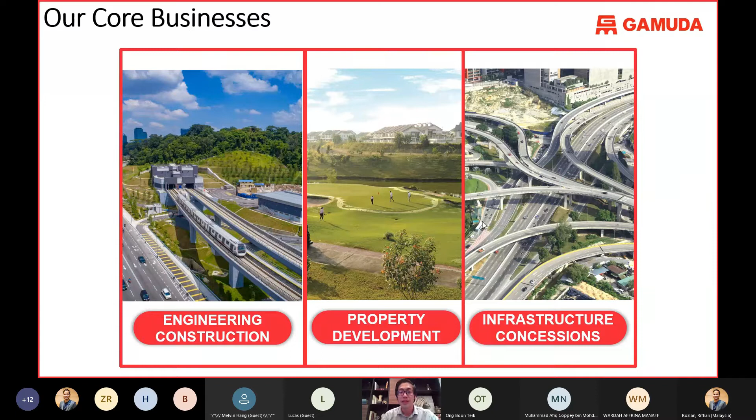Gamuda—who we are. Essentially we have three main divisions in the group. One is engineering and construction, primarily heavy infrastructure—if you're familiar with our group, we've recently worked on the MRT projects in Kuala Lumpur. We also do property development, and the third of our core businesses is infrastructure concessions. If you're familiar with the central area, we built the KESAS, the LDP, and so on, and we also own the concessions for these highways.

We have both local and global footprint. A lot of our business has focused on the construction of the MRT lines in Kuala Lumpur over the past few years, since 2012. We've completed the construction of MRT 1, and we're now building MRT 2. And for those of you following the news in Malaysia, there have been recent announcements for MRT 3, which we're looking forward to.

We also have the first digital IBS factory in Malaysia, which I'll cover a bit later—essentially precast construction, where we cast panels or building components in a factory and then bring them to site to assemble. This is one of the key themes and one of the big shifts in the construction industry in the years to come. We do property development, and in earlier years we focused a lot on roads and highways, but in recent years we've transitioned a bit away from that towards public transport and the like. We also have operations in Taiwan, Australia, Singapore, and previously in places like Bahrain, Qatar, and India.

Our vision and mission—the very striking word you see on screen is 'innovative,' and innovation has always been a big part of our DNA. A lot of our projects haven't just been open tenders; we've actually come up with our own proposals and presented them to the government and private players, and very often they've been taken up.

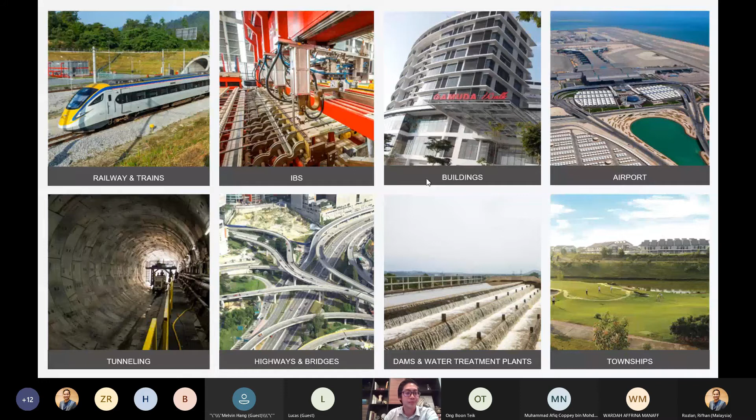But we also do things like water treatment and dams and so on. This is also a very recent project that has been announced, the Penang South Island. Some of you may have seen it in the news. This is primarily a reclamation project where we will reclaim 3 islands to the south of Penang, and the main theme for this island is green.

For those of you familiar with the term, and it's something I'll cover later, this island will embrace ESG principles, and we're putting the environment and green first. So here we will put bikes ahead of cars, and there will be sources of renewable energy and the like.

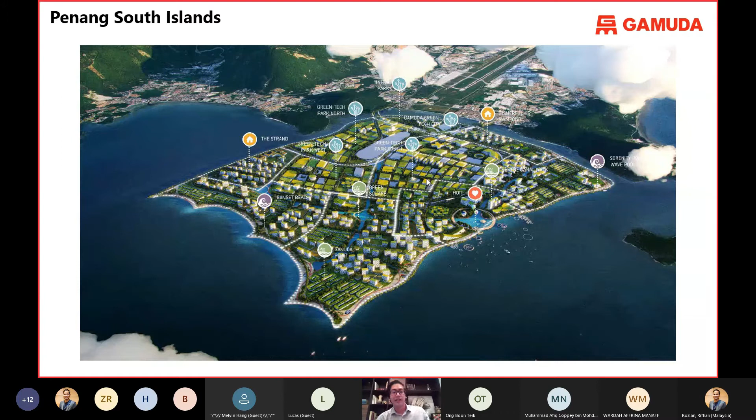So back to innovation. A lot of our innovation in recent years has been focused on the construction of our metros, because that has been the core of our business for the last few years. We've won quite a number of international innovation awards, and I'll share more about this later.

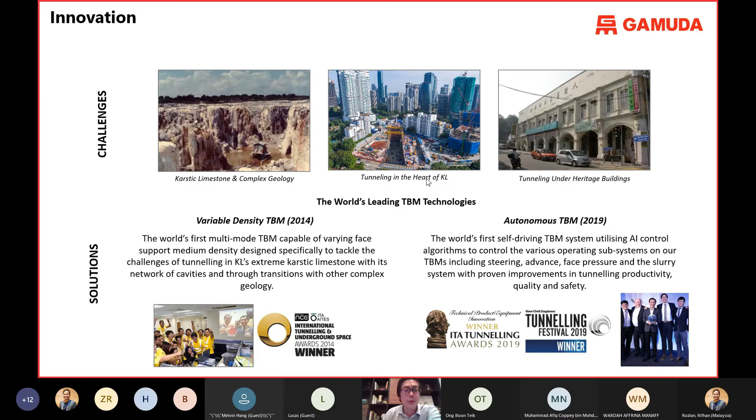And of course, as a contractor, safety is also very close to our heart. In recent years, we've been really committed to safety, and for our metro project, for example, it's far in exceedance of the minimum statutory safety requirements in Malaysia. So we've elevated the standards, working at a higher standard above local regulations, and with that we've won quite a few awards from the British Safety Council in recent years.

Of course, COVID has been a very key theme in the last year or so, and we've actually been one of the most progressive private sector companies in Malaysia in managing COVID risk. We've set up our own PCR lab, and we screen all of our workers every 2 weeks, doing 20,000 tests every 2 weeks.

We have centralized labor quarters, redesigned specifically for the COVID era, so our occupants, workers and staff have sufficient space for social distancing. They have individual facilities for each block, so they don't need to mix with each other too much, reducing the risk of transmission.

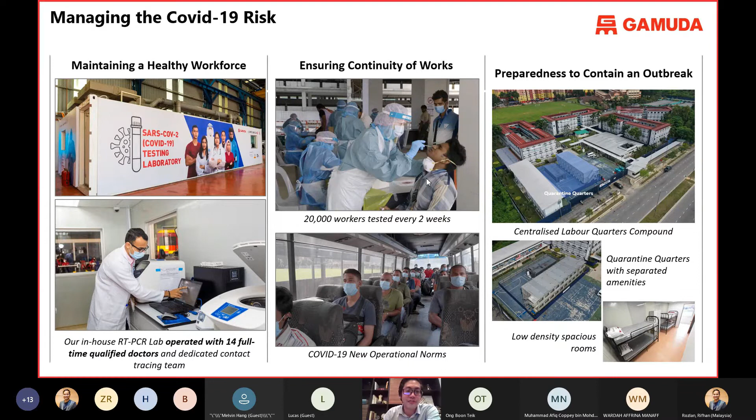Particularly in line with these COVID efforts, in the last year we've made it to the Forbes World's Best Employer list, and we're the only Malaysian company to make the list. We ranked number 44, ahead of companies like Ferrari, Netflix and so on. From the feedback, we understand it had a lot to do with how we really took care of our staff in terms of COVID risk.

Okay, so my Gamuda journey so far. This part is primarily to give all of you a feel of what a career in construction could potentially look like. Obviously it differs greatly between people and companies, but this is my experience so far, just to give you a quick taste.

I currently hold 2 main roles within the company. At a corporate level, for Gamuda Engineering, the engineering arm of Gamuda, I'm an executive director, so this is a bit more of a business and strategy role. In this role I look at a lot of digitalization, ESG, and new growth opportunities.

I also have an operational role, meaning this is my role on a project. I'm seconded to the MRT2 project in Kuala Lumpur, where I'm the general manager for tunnels, in charge of running the tunnel operations on the project.

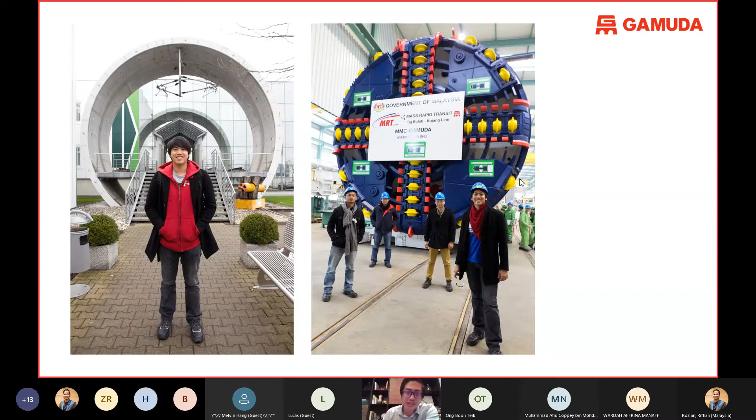Tunneling is also a very international field, so a lot of the supply chain, the suppliers for materials or consumables, are from overseas. In the early days, part of the procurement process, we got to travel all around the world to visit suppliers and so on. In recent years, we've built up the local supply chains, so a lot of these things are available locally now. That's part of how we run the project, because we want to empower the local suppliers and grow the local SMEs as part of the project, so that we don't need to look overseas for these supplies.

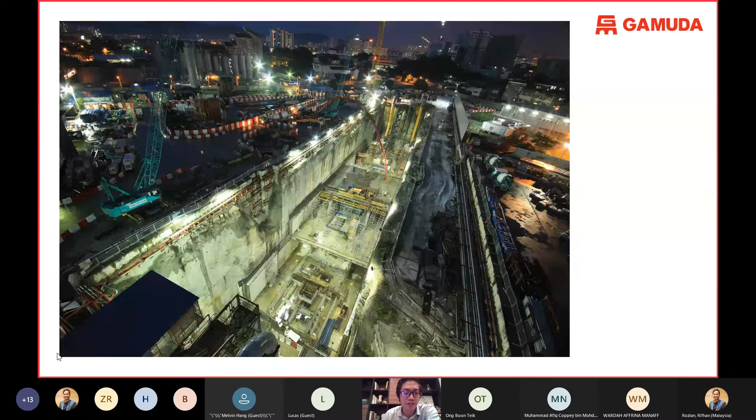It would be quite hard to imagine that a few years back there was a huge 40-meter deep hole in the ground. Now all you see is just the roof of the MRT station. So I started my career as a tunnel engineer.

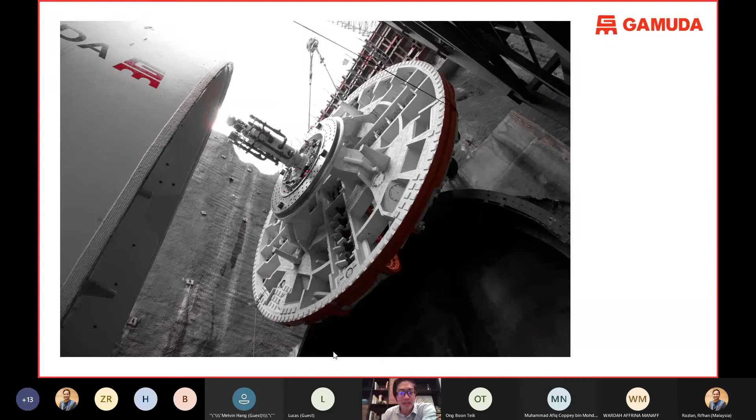This is a picture of the cutter head of a tunnel boring machine, which is what we use to cut the ground. These tunnel boring machines are huge. This is just a picture for context of scale - they are about 3 stories high, and they are huge machines, a couple of 100 tons in total.

It's quite an exciting mix of disciplines, tunneling. I'm a civil engineer by trade, but we also have a lot of mechanical and electrical engineers involved, and geologists for obvious reasons. Primarily we are doing engineering, but we are also running essentially a production line - we are digging the ground and building a tunnel behind it. So a lot of mechanical and electrical engineers are also involved.

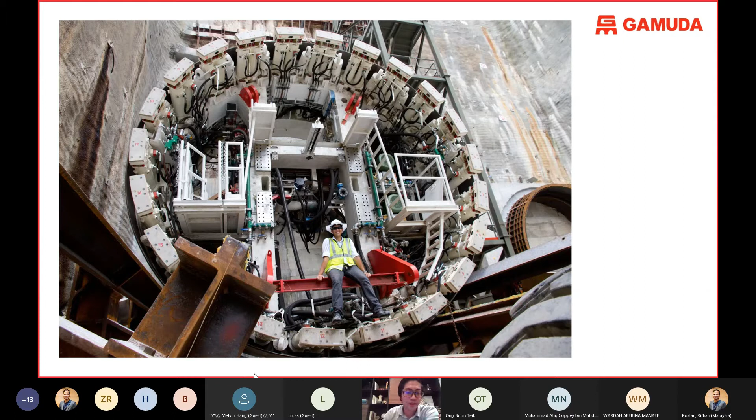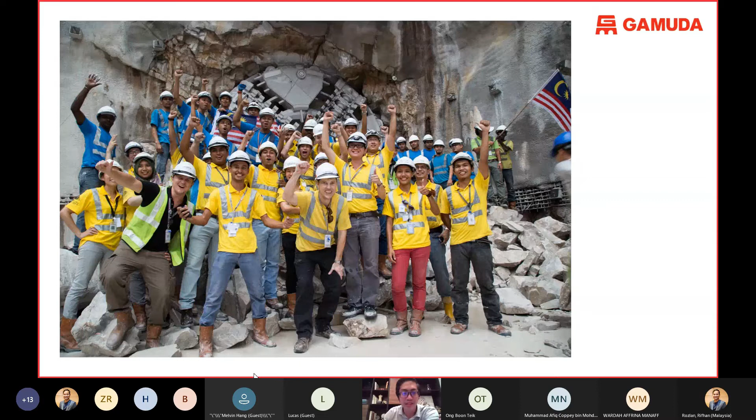This is a picture of our breakthrough - this is what happens when the tunnel reaches the other end, when it starts the tunnel drive, does 1 or 2 kilometers and reaches that end. This is usually the highlight of the early days of my career, because it's quite a good feeling when you see the tunnel boring machine actually reach the other end.

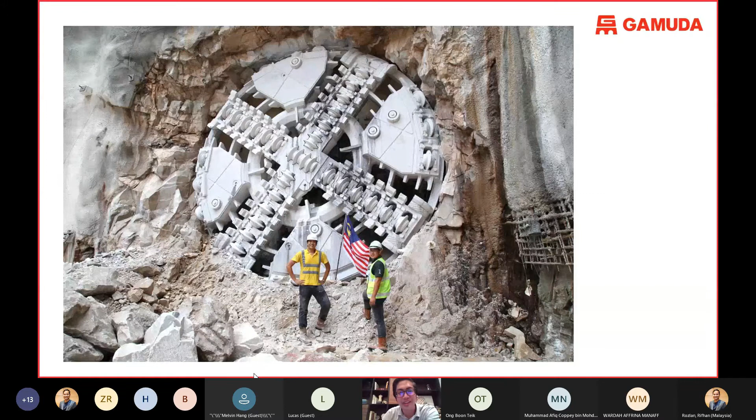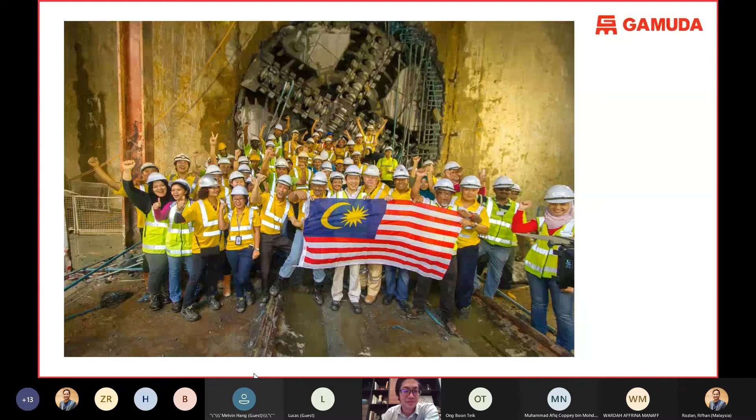A couple of the drives - this was the last breakthrough we had on MRT1, at Pasar Seni station. In line 1 also, we won a couple of innovation awards. This is one of the awards we won for the innovation of our variable density TBM - without going into too much detail, it's essentially a new type of tunnel boring machine which we developed specifically for the tunneling works in Kuala Lumpur, and we won one international award in London.

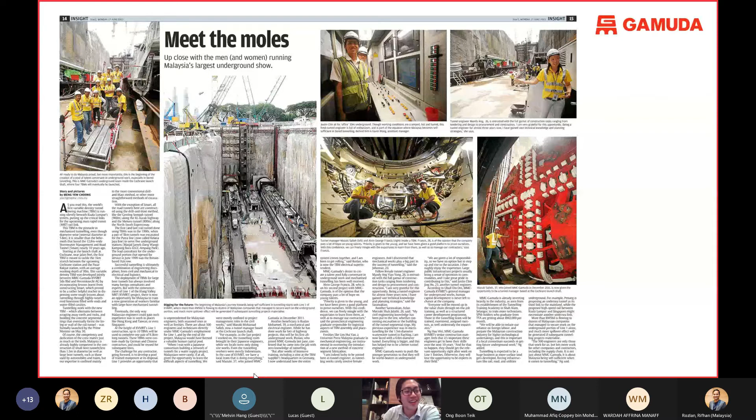Also, because the project is a very high-profile project, we actually get quite a lot of news coverage, and as a young engineer, it was quite fun to actually get to be in the news quite often.

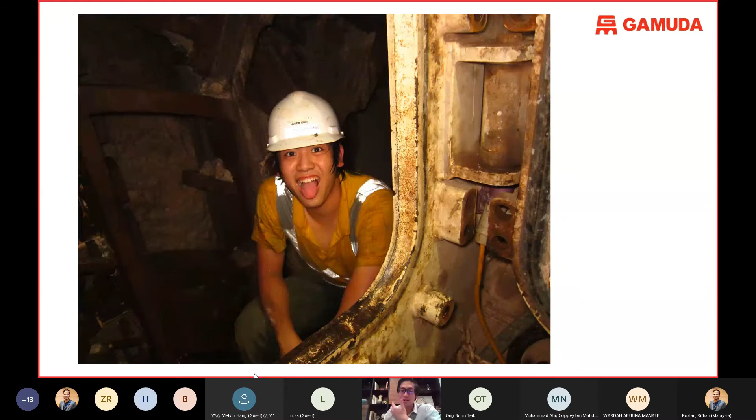It's also honestly a very dirty job. This is a picture of me - this is a TBM cutter head. So what happens is as the TBM mines through the ground, the cutting tools which cut through the ground get worn down. Because we are excavating 30 meters underground, the groundwater is all around us, so this chamber is actually pressurized to keep the water out. For those of you who like to dive, this picture was taken at 3 bars, equivalent of being 30 meters underwater. So we actually need very special training, and there are quite a lot of risks associated with it. But as you can see, it's quite a dirty job - very hands-on if you like that.

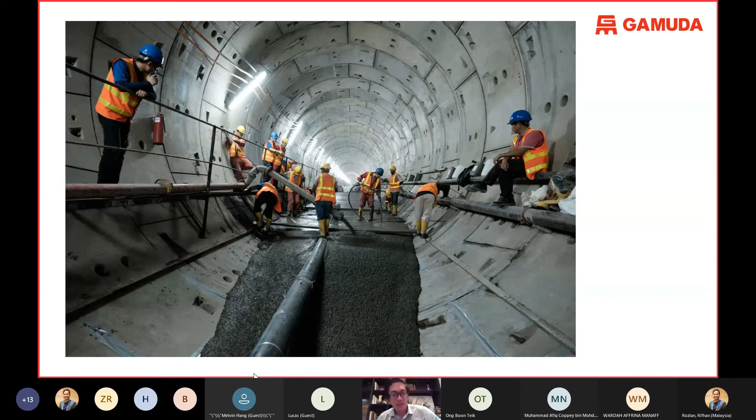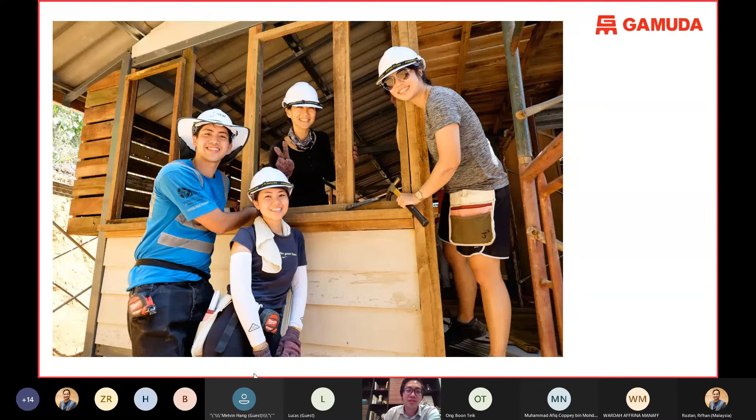Other than construction, as part of our work in GAMUDA, we also quite focused on enriching communities. This is some of the work we've done as part of my engineering career with GAMUDA. This is when we built a house for some orang aslis in Pahang.

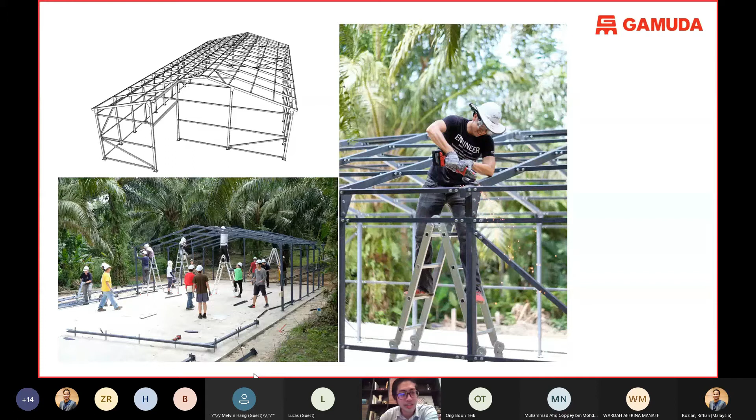This is also another project where we actually built a greenhouse. We designed and built it, and we constructed it by hand because there was no power in the region. This is near Tasik Chini in Pahang, so we built this greenhouse for the orang asli community there.

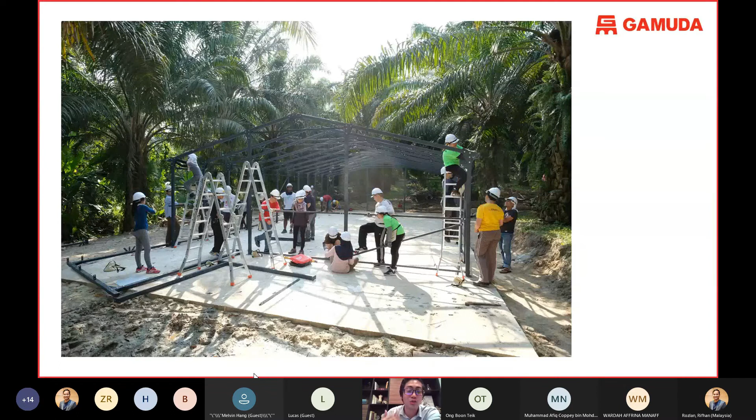This is one of the more fulfilling parts of my career, which I quite enjoyed. We built this greenhouse, and they used it to plant their seedlings and do organic farming. This is some of the produce that has come out of this project.

Actually, the community now is self-sustaining. They sell all of these organic produce to Jaya Grocer. So if you actually look for this OA Organics, this is something you can see in Jaya Grocer, and I think it's really changed the lives of quite a few communities in the area.

Apart from the dirty work, unfortunately, there's also a lot of paperwork. A lot of young engineers don't like this very much, but that's just the nature of the work. Projects are quite cyclical, so what you need to do is tender for the project, win the project, and deliver the project.

Sometimes there's maintenance after that, and after that you need to go and win new projects to keep the company going. So there are parts of my career where I'm stuck in the office churning out paper, and there are parts where I'm down and dirty, getting my hands dirty, and so on.

Of course, as engineers, there's a lot of continuous learning and development, so we participate a lot in global conferences. This is, for example, one of the conferences I presented in Singapore. This was a specific geotechnical conference in Hanoi.

This will lead into the next bit of my presentation where we talk about construction trends. This was actually one of the highlights of my career. At the end of 2019, we won 2 International Innovation Awards for our autonomous TBMs.

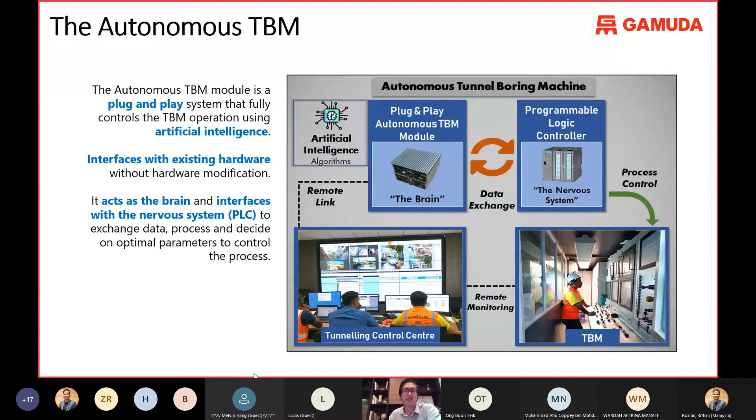So in construction, people typically rely on experience. Everything is very manual. This is one of the key shifts which we will see in the next few years.

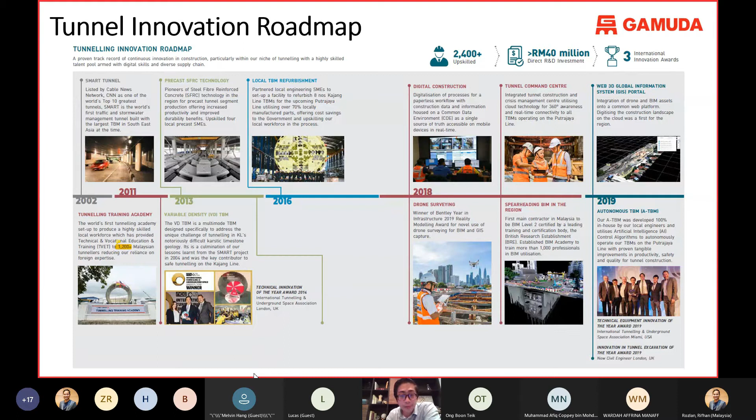After the autonomous TBM, we continued building on that, and as innovation is quite a key theme in our group, we now actually have a specialized innovation arm which focuses on a lot of digital technologies, which we will cover in a bit.

So if you look at the construction industry trends in the coming years, let's have a quick look at this and pick up a few key themes. More than 1 in 3 German railway bridges are more than 100 years old, so eventual maintenance will be one of the key themes in the future.

We are also the number one consumer of raw materials in the construction industry. Just the use of cement and steel contributes to about 10% of the global carbon emissions, just from the production of steel and cement. So climate change is a very key theme in the coming years.

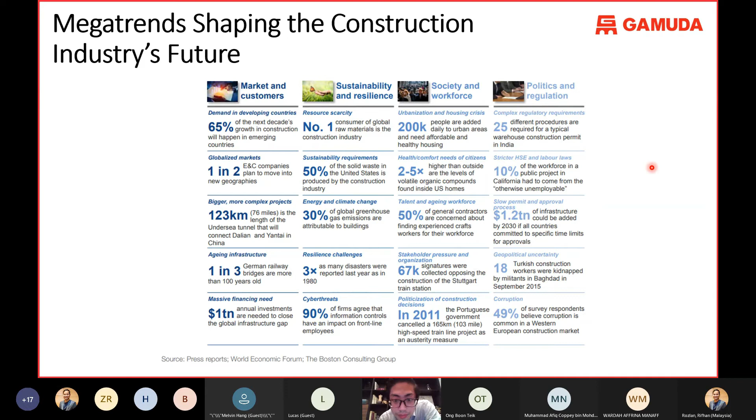Let's see what else is here. Affordable housing - that's also a very key theme in the coming years. Let's move on to the next slide.

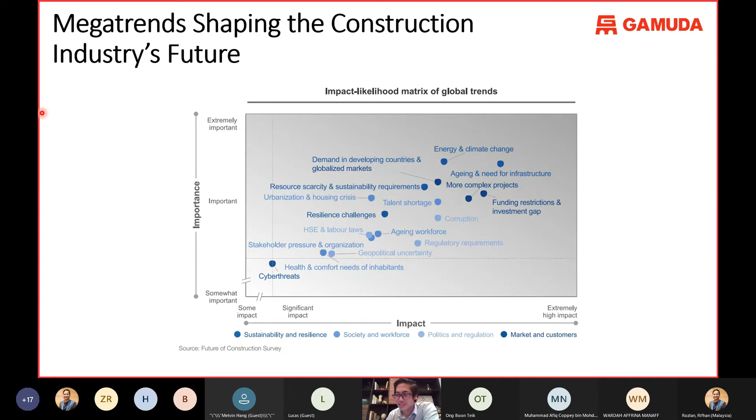Whereby you are able to visualize your whole construction in 3D. So you have a 3D model, you can look for clashes, potential interface issues, but also within the model you build in your cost data. If you click on a certain section, you know how much this costs. You're also able to click on it and build in program data, so you can tell when this particular element needs to be installed.

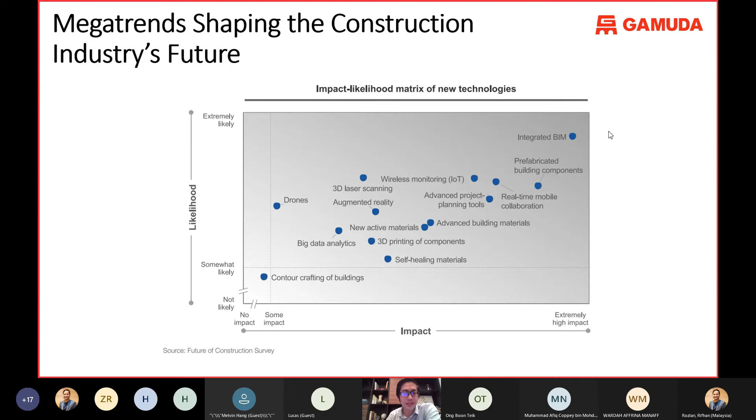Prefabricated building components will also be quite important in the coming years, particularly because skilled labor is severely lacking - not many people want to do manual labor anymore. And also the demand for increased productivity is increasing in the construction industry. There are things like real-time mobile collaboration, wireless IoT, drones, and so on. A lot of these are digital technologies, which for me is one of the main trends that will shape the construction industry in the coming years.

So in construction, obviously there are different phases - there's design and engineering, there's the actual construction, and eventually there's the operations and maintenance and so on. So these technologies, like for example BIM, actually cover the whole life cycle of the project, and with this you're able to track the costs, the maintenance costs, the location of all your assets, and even the carbon footprint of your project, which is becoming increasingly important.

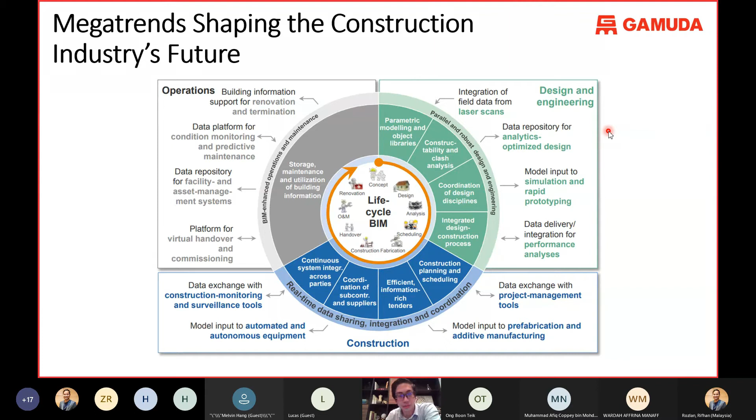Digital engineering, so this is the BIM I talked about earlier. With extremely complex projects, you have a lot of interfaces, a lot of systems. There's the M&E, there's the civil works, there's the architecture. How do you plan all of this on a single platform? So this is what BIM technology offers.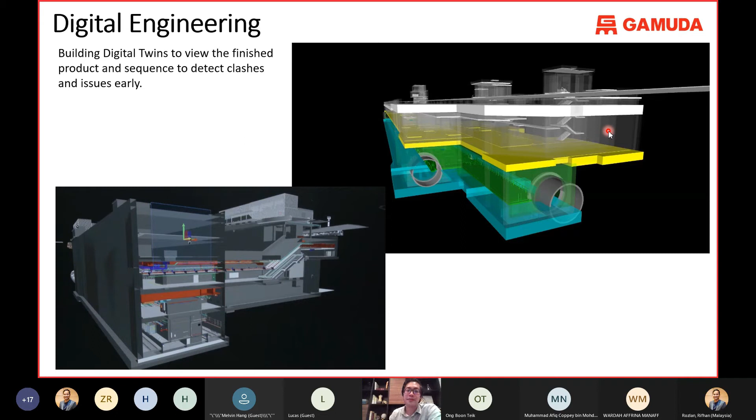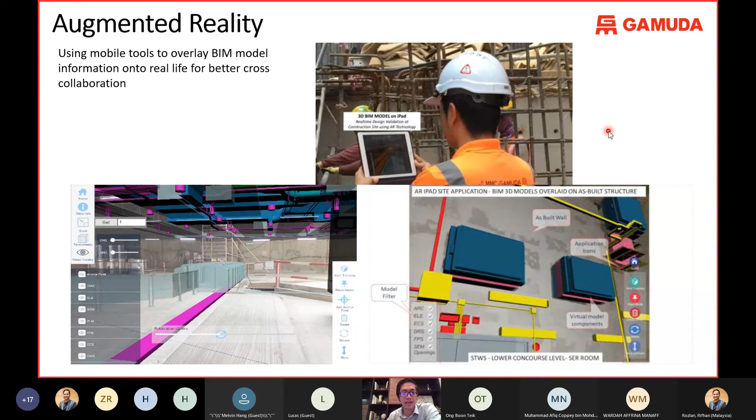These BIM models, you can also complement them with different technologies like augmented reality, whereby you have the BIM model, you can upload it onto, say, a tablet, and then use the camera on the tablet with some reference points to actually show you where this part goes, and so on. So you actually minimize rework and minimize clashes, because traditionally a lot of these drawings were in 2D.

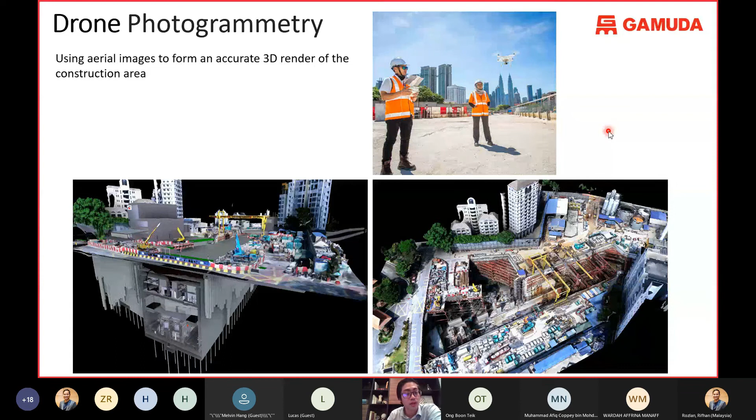Now they're done in 3D, so you have much less of that problem. The use of drones as well for surveying, to pick up levels and construction data, and also eventually for progress reporting, which we are starting to use already. So the drones fly around, they pick up reference points, and they actually automate the reporting progress - this panel has been cast, this wall has been cast, and so on.

The precast elements and prefabricated buildings, this is definitely one of the emerging trends, whereby you do a lot of the construction in a factory. You cast your concrete panels in the factory, so you reduce wastage. You actually have much better quality control, and in terms of productivity it's much higher, and the reliance on manual labor is much lower, and of course from a health and safety perspective it's also more desirable.

One of the problems with higher adoption of this technology in Malaysia is because the cost of foreign labor is still relatively cheap in Malaysia compared to a lot of other countries. So a lot of people are still very inclined to rely on foreign labor, but also with COVID and so on, I think a lot of people are starting to see the value of prefabrication.

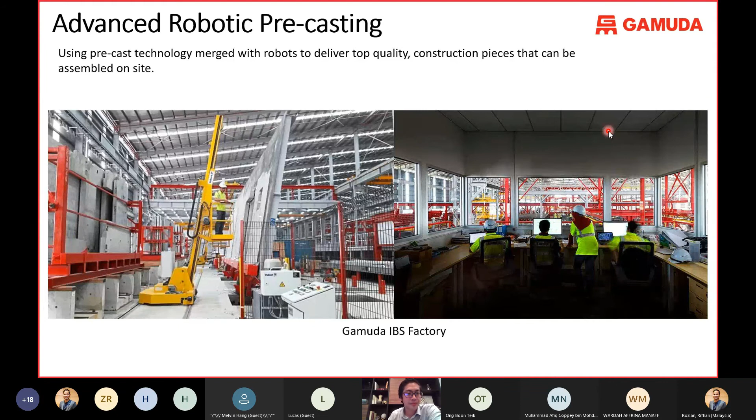Of course, robotics. This is one of the robots we use on our tunneling projects to change the cutting tools. I explained earlier how it's a very dirty and risky environment, and as far as possible, we try and isolate the human from these environments and minimize the exposure to these more risky environments.

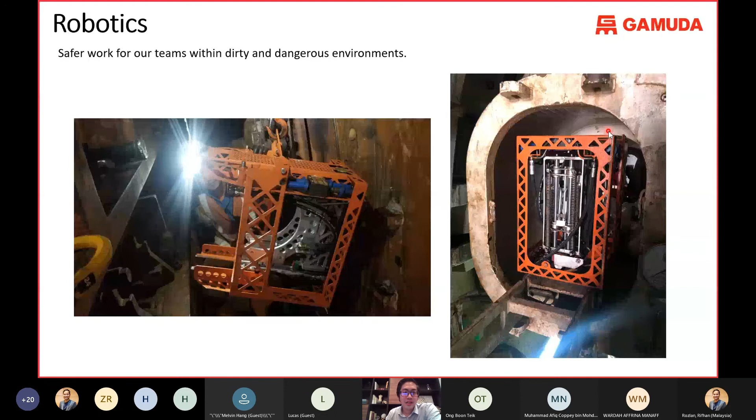I know a lot of you are UK graduates, and I also understand that, at least in my days, I'm not sure how it is now, but there was quite a lot of focus on programming, and a lot of people came out of their bachelor's and master's degrees with at least a basic programming skill set. I think a lot of those people who had those basic skills have thrived in recent years, because these are quite new skill sets which are required in the construction industry in the years to come.

Okay, so ESG, I spoke about this earlier, but perhaps this is a good time to ask the question. How many of you actually know what ESG stands for? Can I just have one or two volunteers to just try and explain to everybody what ESG stands for? Or if you don't know, take a guess. Anybody at all? Anyone who would like to volunteer? Quiet crowd, oh I think they're quite shy.

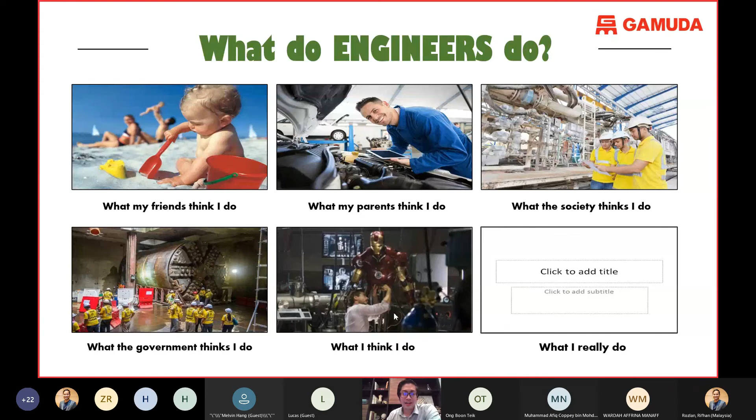On the topic of ESG, it's a very important trend in years to come, and for me the best way of moving in that direction is to read more. The science of climate change in general is very complicated, and let me give a quick illustration of why reading and knowledge is important rather than just jumping into trying to implement ideas. For example, say we want to address climate change.

Someone could suggest, why don't we go and plant more trees? Very noble idea, but why doesn't this work? It's because just to sequester, to capture the carbon generated by, say, an average Malaysian or American, you actually need 50 acres of land to plant 50 acres worth of trees just for one single person. So actually planting trees, while it sounds like a very good idea, in the big global climate warming picture it doesn't really do too much.